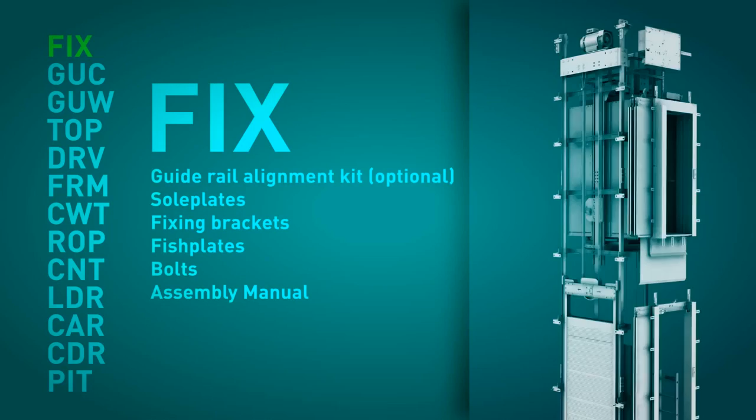VITA considers the installation of an elevator as a sequential assembling process of elevator subcomponents. It is for this reason that the parts of VITA's elevators are carefully sorted and supplied in modules. By module, we mean the group of components which, once assembled, carry out a specific function within the complete elevator.

Each module can be made up of one or more packages. These packages are identified with a description of the module and its position within the assembly sequence. The supply of the elevator has been designed to fit what we consider to be the logical assembly sequence of a machine roomless elevator.

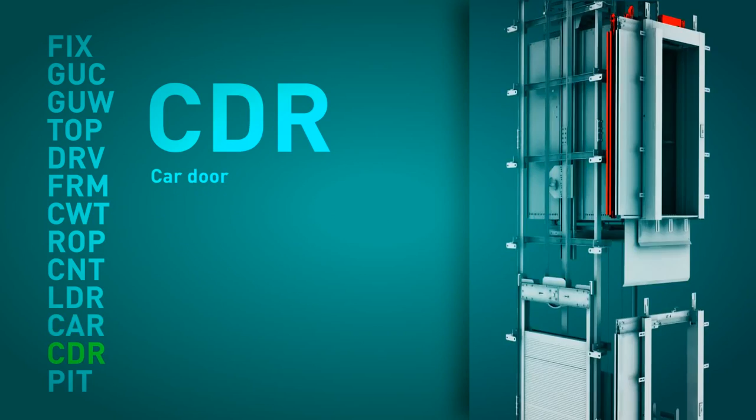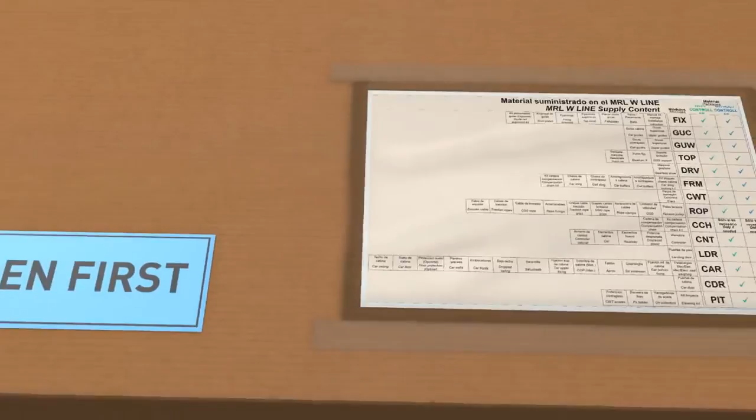The package that we have to open first is labelled and easily identifiable. Attached to this package, in a protective plastic cover, is the packing list and a document which details and lists the material supplied in each of the various modules.

In this first package, we can find the assembly manual of the elevator and all the assembly handbooks of the individual components. Before starting the assembly process, we strongly recommend the assembly technicians read all the manuals in detail.

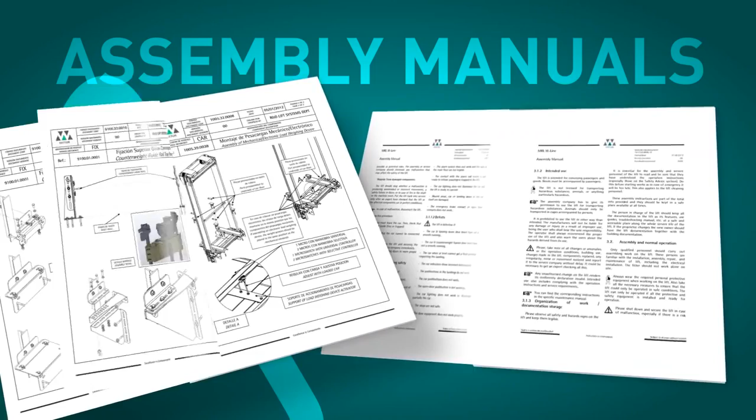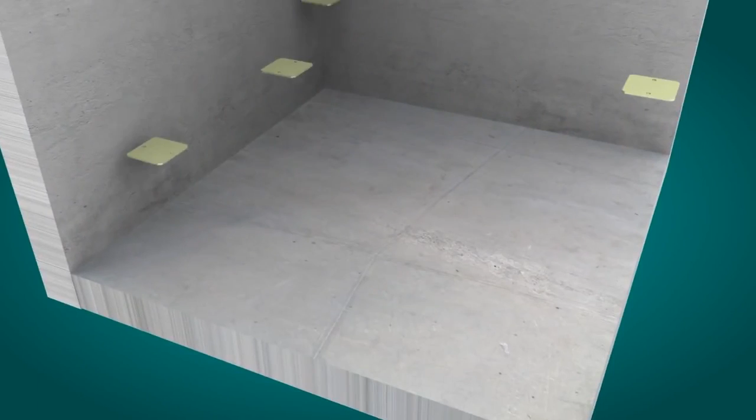The assembly of the MRLW line starts by checking that the conditions of the shaft, dimensions, cleanliness are satisfactory and that all the necessary material and auxiliary tools are available on site. The guide rail sole plate must be correctly positioned and levelled according to the assembly manual.

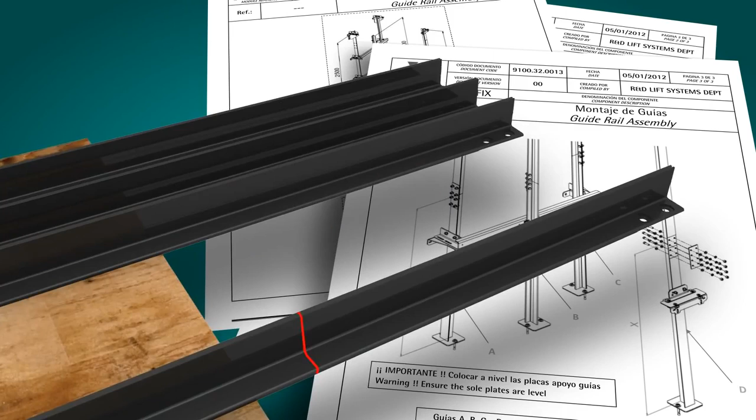The bottom portions of the car and counterweight guide rails are cut and assembled according to the installation drawings. Should there be a difference between the pit depth given in the installation drawings and the as-built depth, the bottom guide rail can be adjusted and cut to the right length.

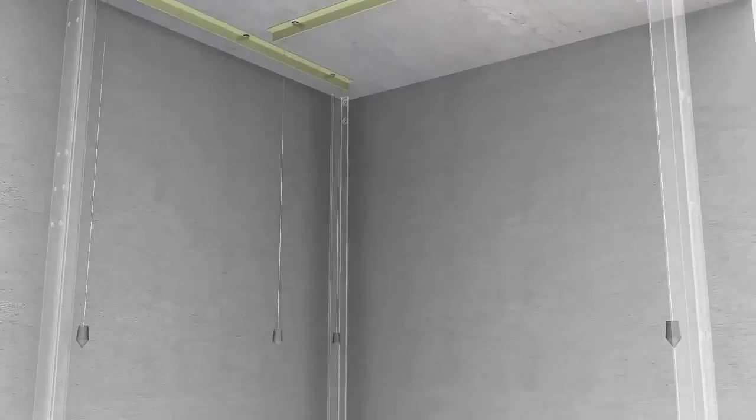A tool to help align the guide rails is recommended in order to guarantee a correct assembly. VITA can supply a guide rail alignment kit upon request. The first row of guide rail supports is assembled. Their position is detailed in the installation manual.

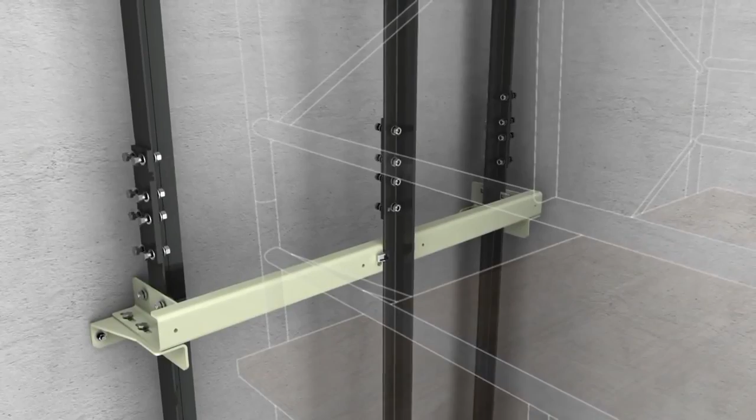With the help of some scaffold platforms, the successive guide rail portions, 2.5 meters or 5 meters, are assembled with their corresponding support brackets. Once the last section of the counterweight guide rail has been assembled, the topmost bracket can be fixed into place. The last portion of the car guide rail fixed to the bed plate is assembled once the machine support has been installed.

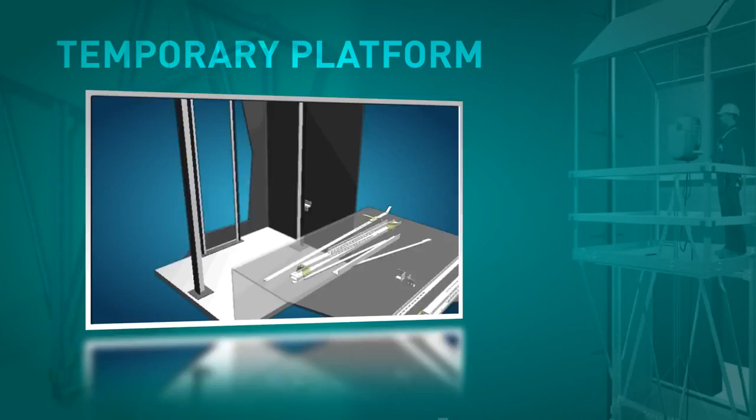Alternatively, the process of assembling the guide rails can be carried out from a temporary platform which is fixed to the guide rails that have already been mounted and lifted up through the shaft by means of a block and tackle.

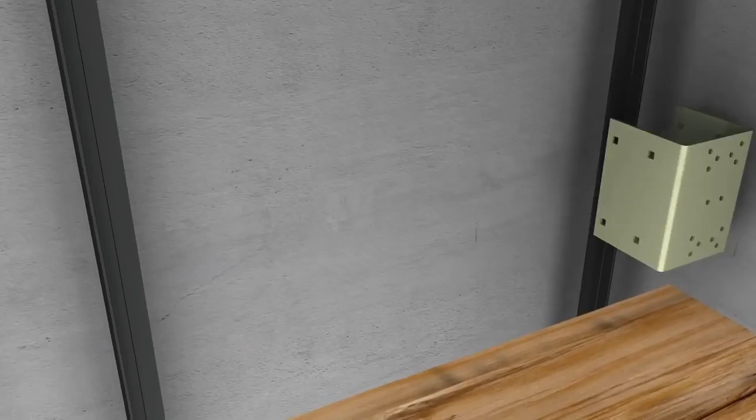The machine bed plate is assembled next. A comfort kit is standard supply for 1.6 meters per second, but optional, though highly recommended, for 1 meter per second. These low-frequency metallic cushions absorb any vibrations that the system may produce.

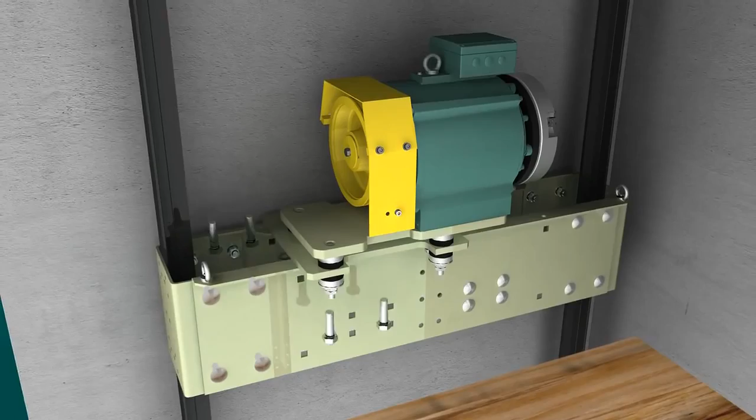The machine is fixed to its support and is lifted and guided into position with the help of a block and tackle. It is fixed to the sheave side with the fixings provided, and once the machine is level, these fixings and the clamp can be tightened. Once the machine is in place, the penultimate guide rail support and the last section of car guide rail fixed to the bed plate can be assembled.

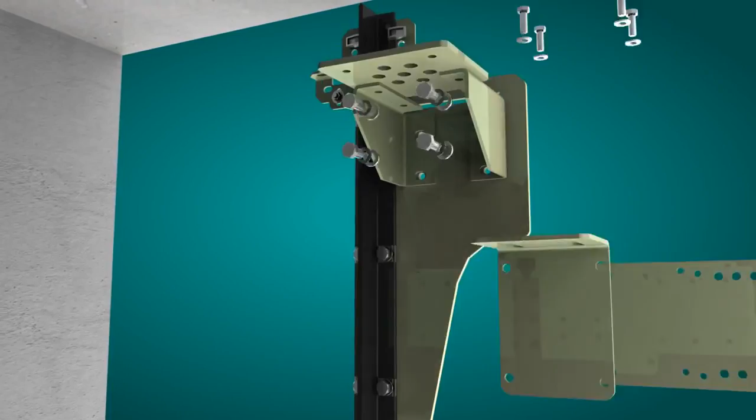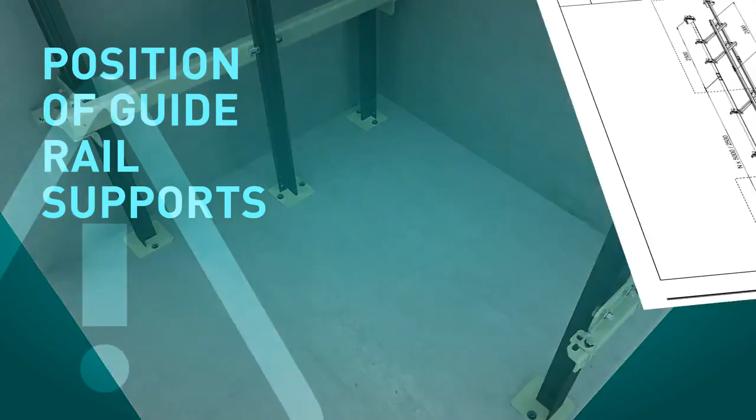The dead hitch point can now be assembled, followed by the overspeed governor and the slack cable control device, should it be applicable. At this point, all the mechanical elements of the elevator are assembled in the headroom. All the guide rail supports must be placed in the positions detailed in the installation drawings. The position of the top and bottom brackets is of special importance. Any scaffolding and platforms should be removed at this point.

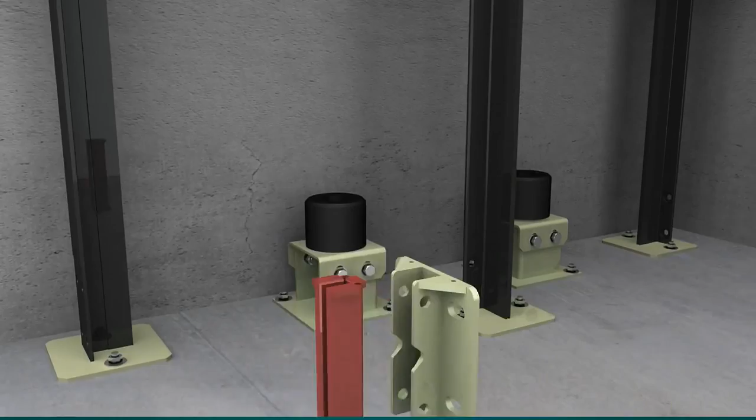It is now time to go into the pit. In the module FRM, we will find all the components relating to the car and counterweight frames and the buffers. The counterweight buffers should be assembled first of all in the position detailed in the installation drawings. Resting on its buffers, the counterweight frame is then assembled.

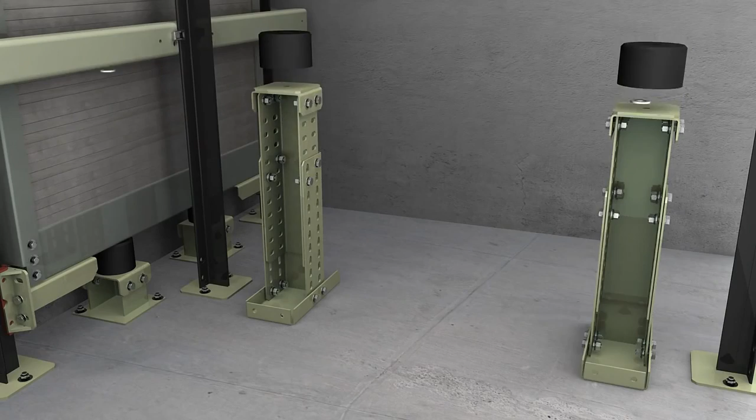A partial loading of the counterweight should then be carried out, according to the individual assembly requirements of each elevator. The car buffers are assembled next, in the position detailed in the installation drawings. Resting on its buffers, and on the car floor, the car frame is assembled. As an optional accessory, VITA offers a temporary protection to protect the car floor whilst the assembly process is taking

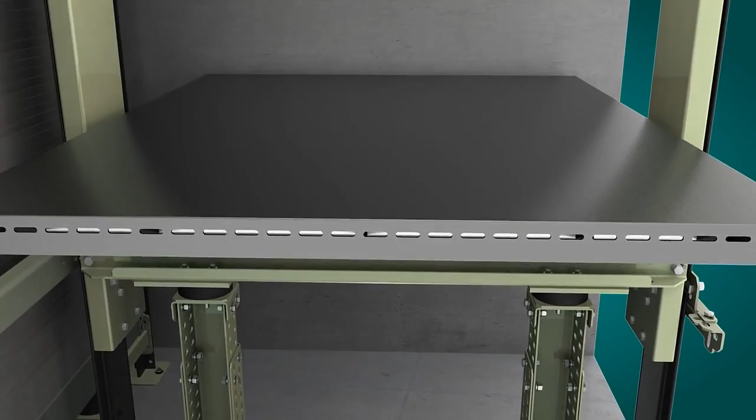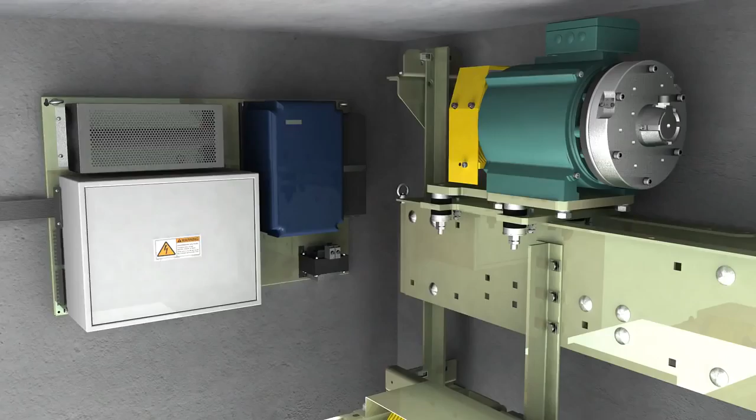place. The slings are now correctly assembled and positioned within the shaft and between the guide rails, and it is time to suspend the car slings in order to assemble the traction ropes. All the necessary material is supplied in the module ROP. The machine should previously have been connected to the power with the encoder cable.

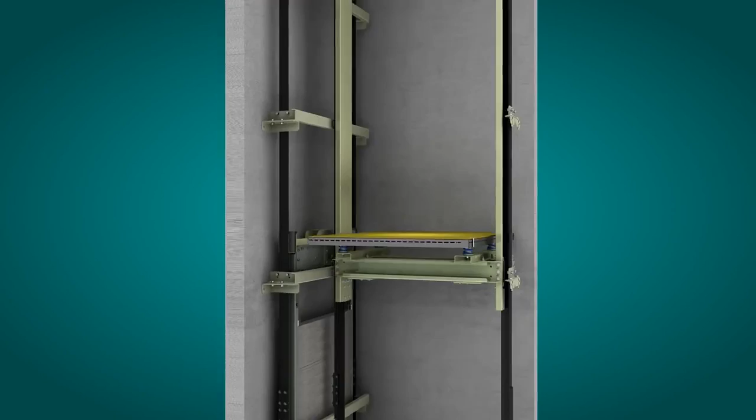The car sling is then lifted with a block and tackle to the highest floor that allows the floor of the car to lie flush with the landing FFL. Its position is maintained by means of the car frame locking kit. This element has not been designed to specifically suspend the car, but to fulfill the function indicated in clause 6431 of the standard EN 81-1+A3.

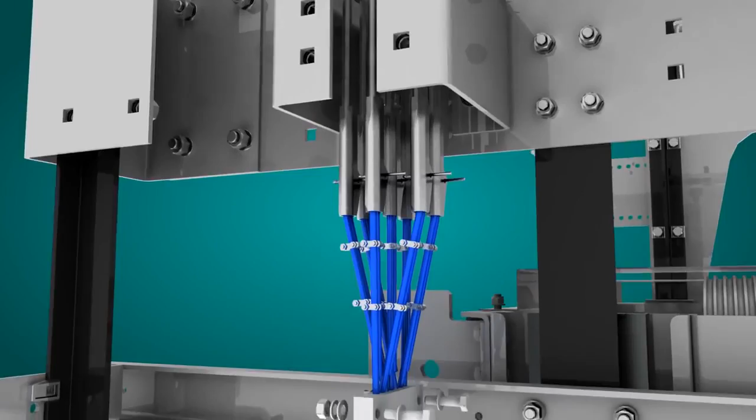For the assembling of the traction ropes, please follow the instructions detailed in the elevator's installation manual. Repeat the process as many times as needed. A rope clasp guarantees the correct alignment of the ropes as they are fed into the grooves of the sheave.

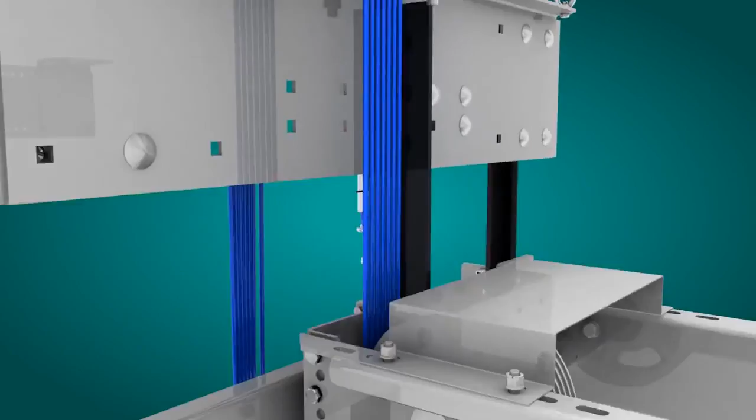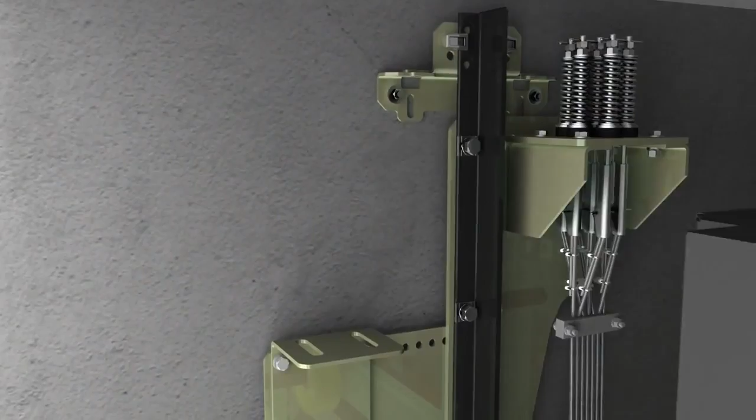The next step is the assembly of the overspeed governor, its tension weight and the cable that joins them. The fixing of the overspeed governor cable to the frame is the last stage of this sub-assembly. At this stage, the elevator can be used as an elevating platform with the use of an assembly operating panel. The elevator must be handled with great care during these journeys. With the help of the elevating platform, the landing doors are assembled.

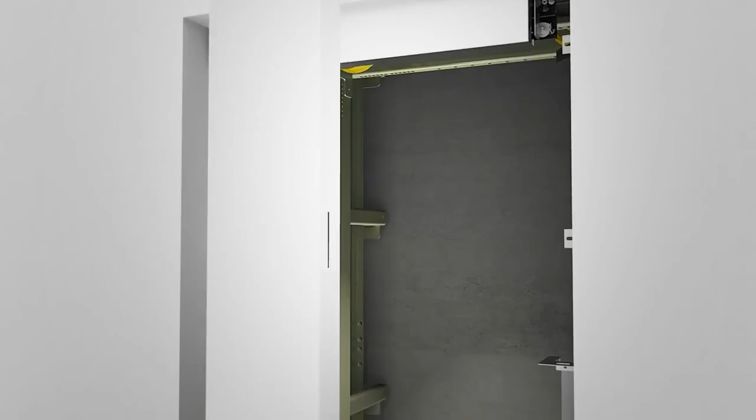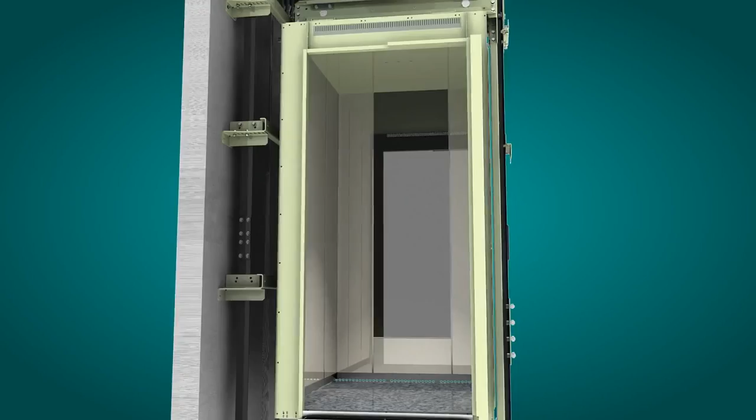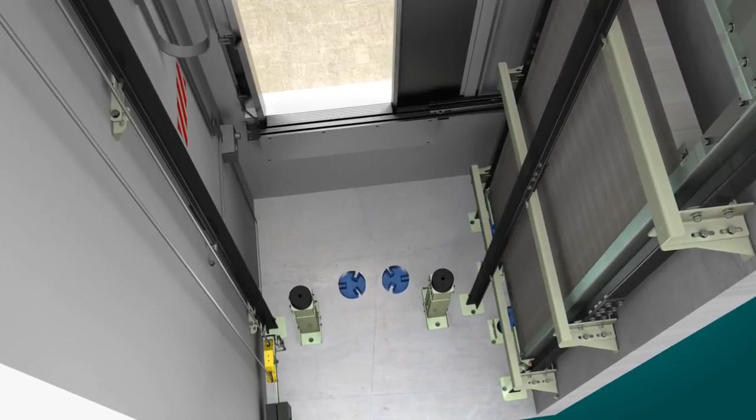Before starting the assembly of the car, it is essential to mechanically block the car frame and to remove the floor protection should it have been used. It is now time to assemble the car door. The pit components can now be put into place. The counterweight screen is fixed to the guide rails, and should it be applicable, the pit ladder is fixed inside the pit. From this point onwards, the electrical elements can be assembled.

The MRLW line controller, with its plug-and-play concept, is probably one of the market's most easy and intuitive controllers to install. It is delivered perfectly packed and identified in 4 packages: power and control, pre-assembled electrical installation of the shaft, electrical elements of the car, and the controller cabinet. In each of these packages there are various assembly kits, each one accompanied by a description of its contents and an assembly manual, numbered according to the assembly sequence.

The controller cabinet, with its reduced dimensions, is placed neatly in front of the frame of the landing door located on the last floor. The simplicity of the controller does not reflect its features. The MRLW line controller can be supplied also according to other standards, such as EN 81-70 and EN 81-73. Upon request, it can also be adapted to the EN 81-71 and EN 81-72.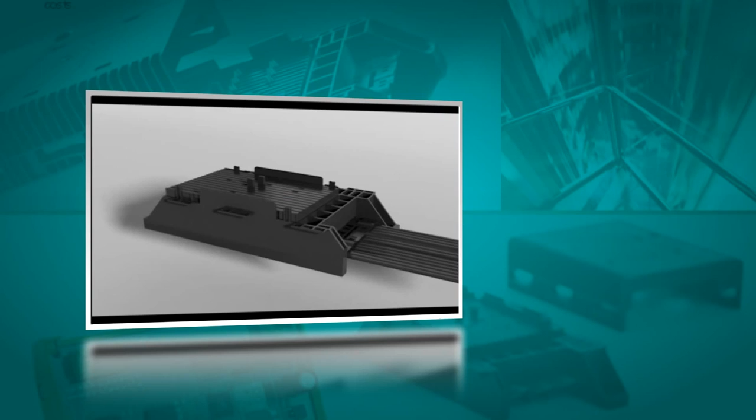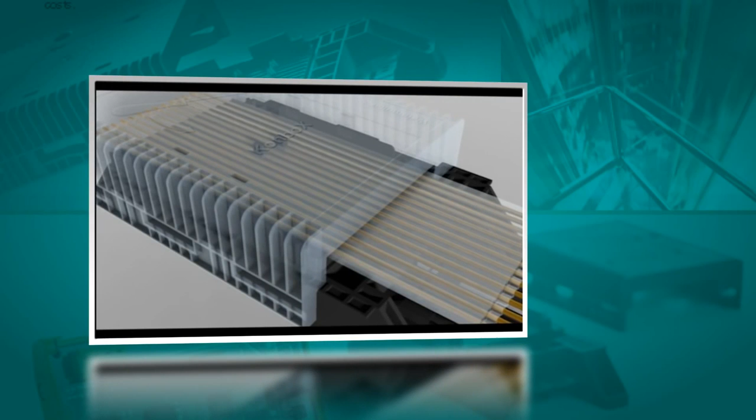Our pre-assembled electrical installation uses the CON-box system, which greatly reduces the assembly time, guarantees the quality of the CAN bus signals, and sets us apart from our competitors. The flat cable is manufactured with highly resistant and durable materials, which guarantee an optimal protection of the low-frequency CAN bus signals. An absolute positioning system of the car by means of a 4096 pulse encoder is optional. This makes assembly easier and guarantees millimetric precision of each stop.

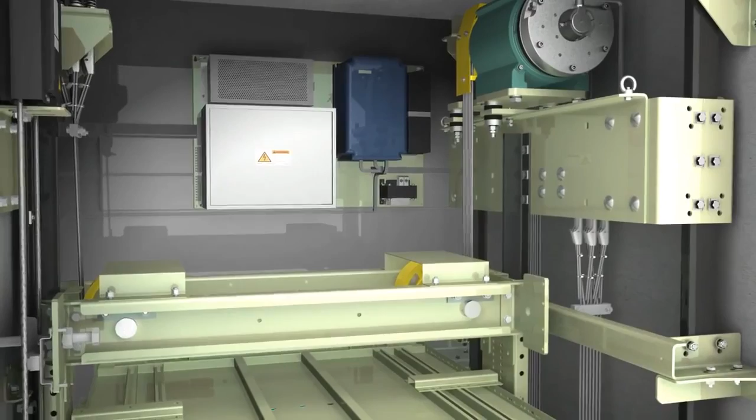The penultimate task is the important one of cleaning the shaft and the pit, and of oiling the guide rails. Finally, before the lift can be put into service, the MRLW line must be submitted to a series of tests, according to Annex D of the EN 81-1+A3, in order to ensure the perfect functionality and safety of the lift. VITA supplies a specific document which guides the assembly technician through all the steps that must be carried out.

VITA has been issued by AENOR a conformity certificate, confirming the implementation and maintenance of a quality assurance system for the design, manufacturing, and final testing of elevators, and certifying that it complies with the requirements of Annex 1 of the Lift Directive 95/16/EC. This means that any assembly company with a quality assurance system compliant with the Annexes 12 Module E or 14 Module D of the Lift Directive 95/16/EC can put the lift into service and certify it accordingly.

VITA can also supply the necessary documentation, allowing any assembly company without a quality assurance certificate the possibility of certifying the elevator through an external notified body according to Annex 6